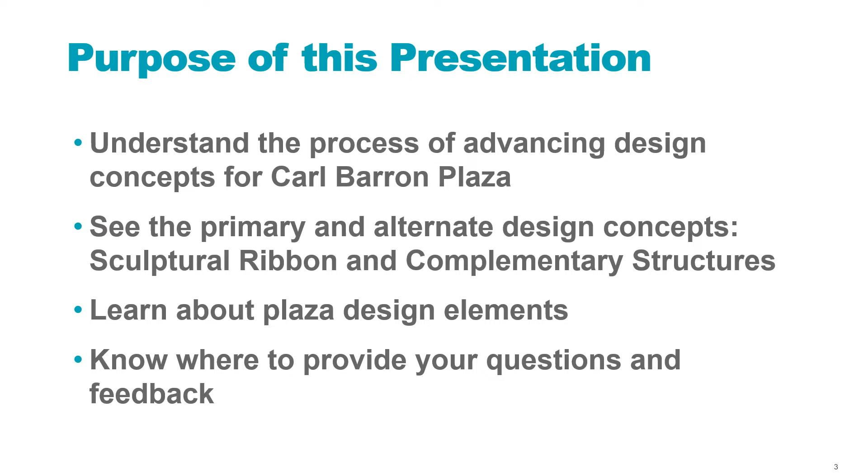This presentation's focus is on the design process and concepts for Carl Barron Plaza, located at the intersection of River Street and Massachusetts Avenue. The purpose is for you to understand the process of advancing design concepts for the plaza, see the primary and alternate design concepts, sculptural ribbon, and complementary structures, learn about plaza design elements, and know where to provide your questions and feedback.

Before we review the concepts, we wanted to highlight a few key design considerations based on feedback we've heard along the way. I won't read these in detail, but the design wants to be inclusive, activated, safe, flexible, attractive, comfortable, multimodal, functional, and all-season.

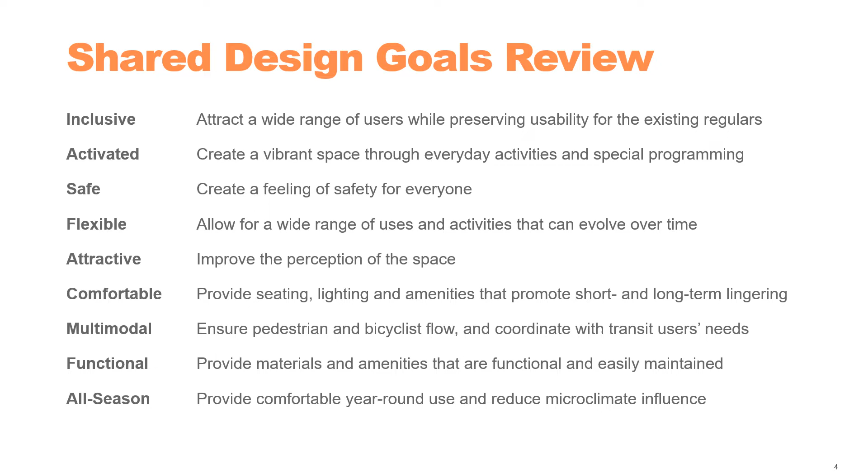A few design givens for the plaza include direct pedestrian routes through and around the plaza, 8-foot minimum, maximize tree plantings and green space, provide flexible plaza areas for a variety of activities, transit shelters at all 3 transit stop areas, an MBTA operator's booth with visibility to all 3 bus stops and layover area, bus boarding areas with an 8-foot minimum clear zone, a separated bicycle facility with 6'6" minimum, and a relocated Carl Barron Memorial within the plaza.

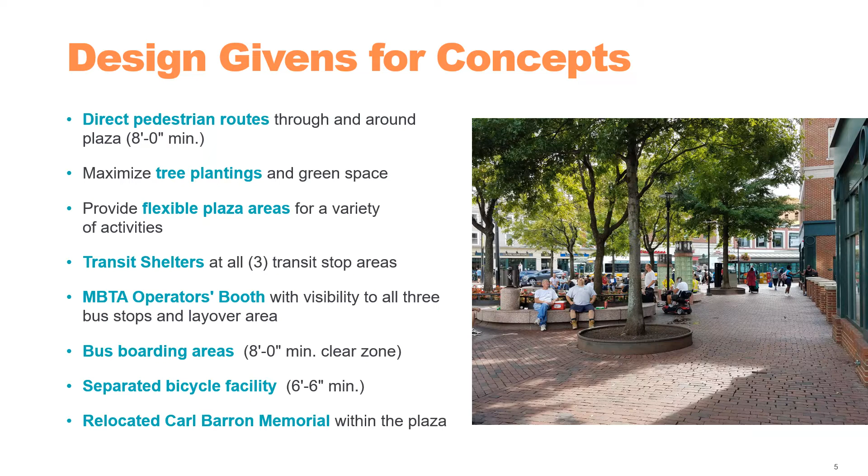Over the last 6 months, we've been working closely with the city's design staff, as well as the Central Square Business Improvement District and other stakeholders, who have shared this additional design guidance.

Establish Carl Barron Plaza as a focal point; be bold, creative, playful, and whimsical; provide enough height to be visible from a distance, but also at a pedestrian scale.

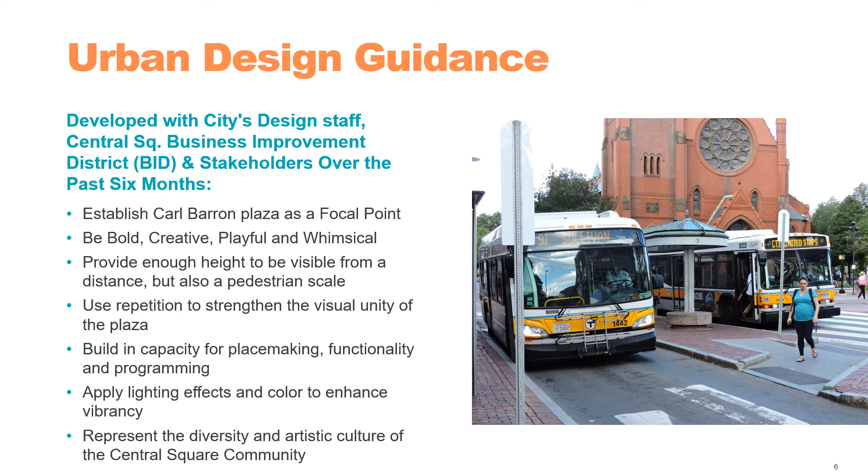Use repetition to strengthen the visual unity of the plaza, build in capacity for placemaking, functionality, and programming, apply lighting effects and color to enhance vibrancy, and represent the diversity and artistic culture of the Central Square community.

There are a significant number of utilities and other constraints within the site, so key design features and tree plantings had to be strategically placed to work around them.

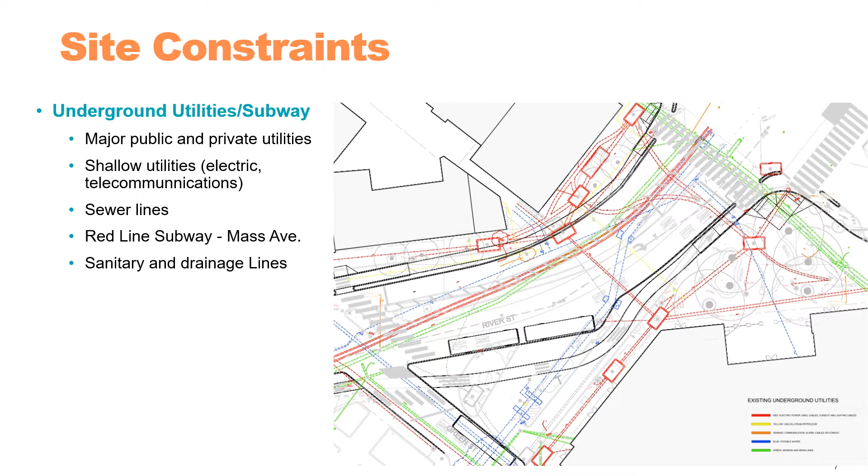Now we're going to show you a few inspirational images of similar projects that helped inform the development of the proposed concepts. These first 2 images introduce the notion of using repetitive sculptural light columns and bench underlighting as a means of unifying the design.

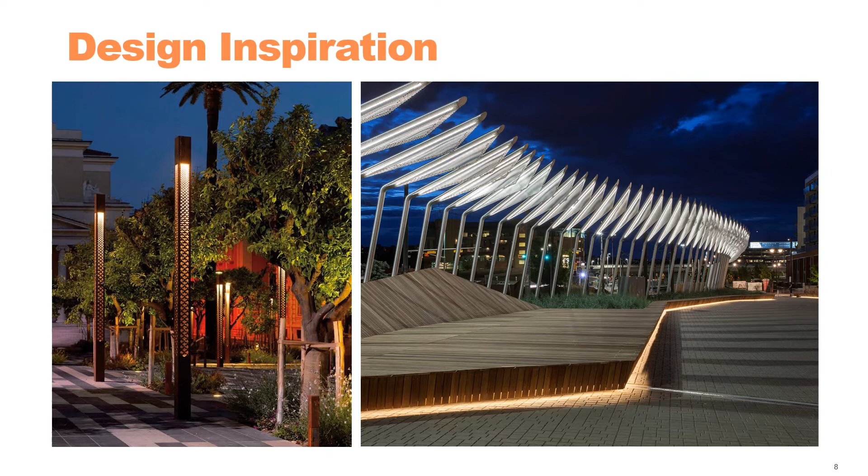These images are examples of introducing a dynamic sculptural form to serve as that unifying element. We're also intrigued by introducing lighting into the feature, similar to the image on the left, to extend the impact of the structure into the evening hours.

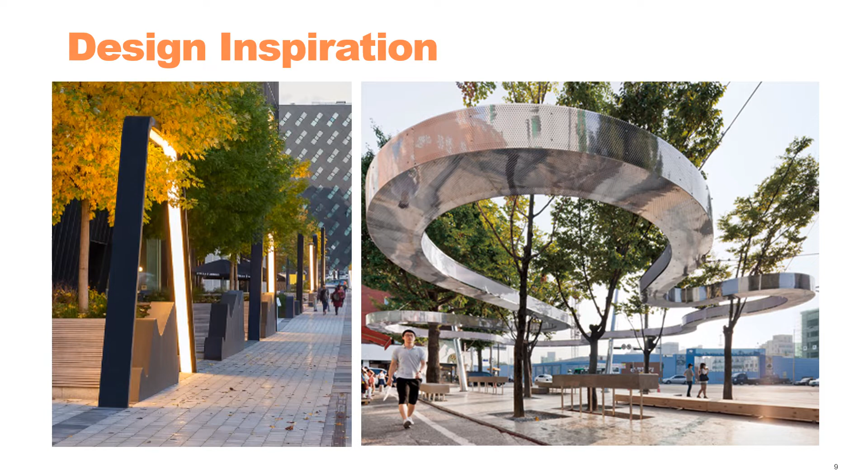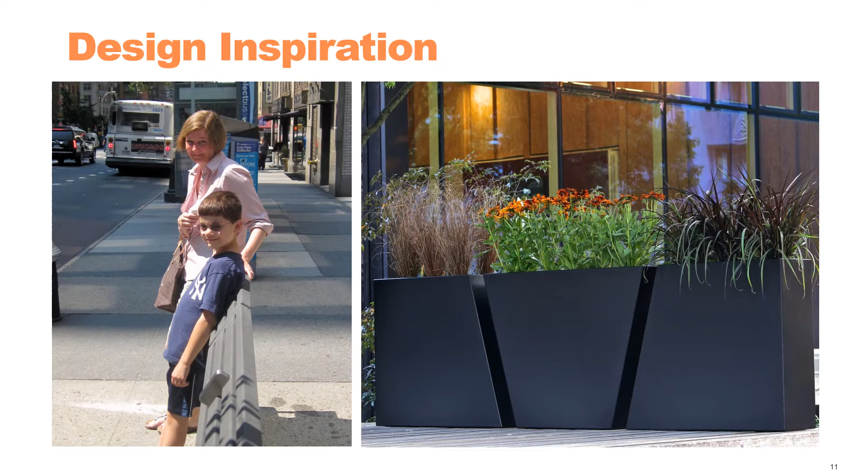In certain areas, planters or lean rails are used to separate bike and pedestrian circulation and limit the mixing of bicycle and pedestrian traffic. Finally, we plan to introduce both flexible and fixed seating.

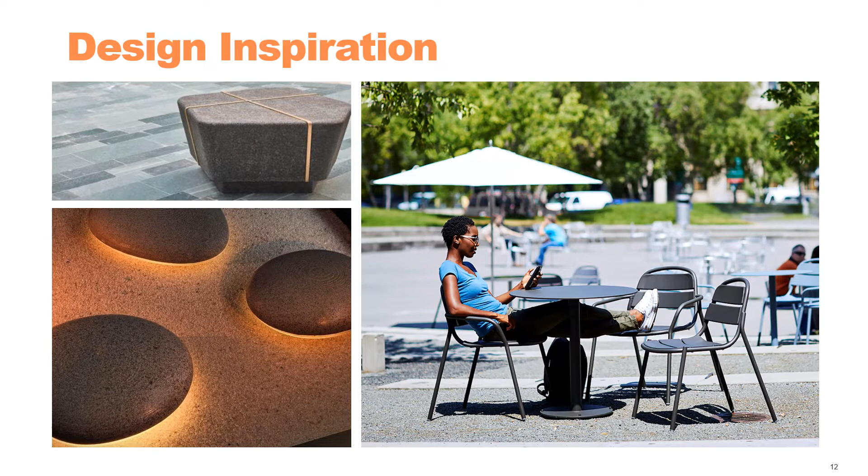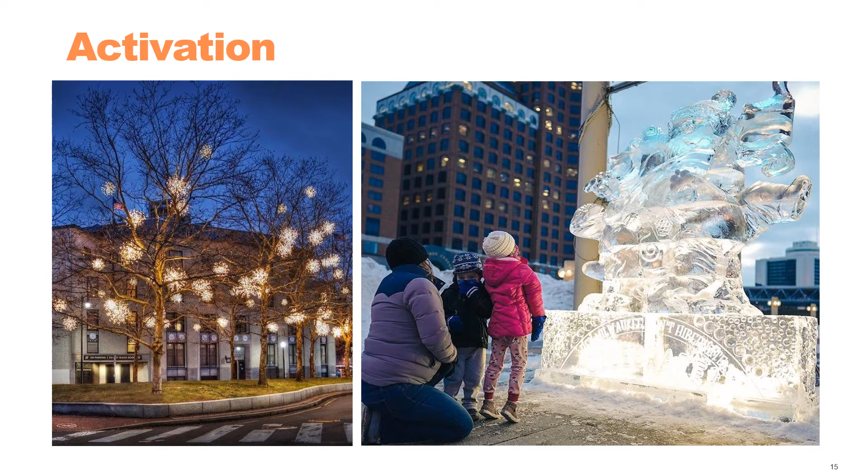And finally, we can activate the space through the winter months by introducing festive lighting or planned events that could include activities like ice carving.

We've received a lot of feedback around how we can best represent the diversity and artistic culture of the Central Square community. There's an eclectic, robust culture celebrating all forms of artistic expression, and the proposed design needs to be equally as engaging and dynamic.

And of course, we need to include typical plaza furnishings like bike racks, trash receptacles, and water fill stations, as well as the Carl Barron Plaza monument.

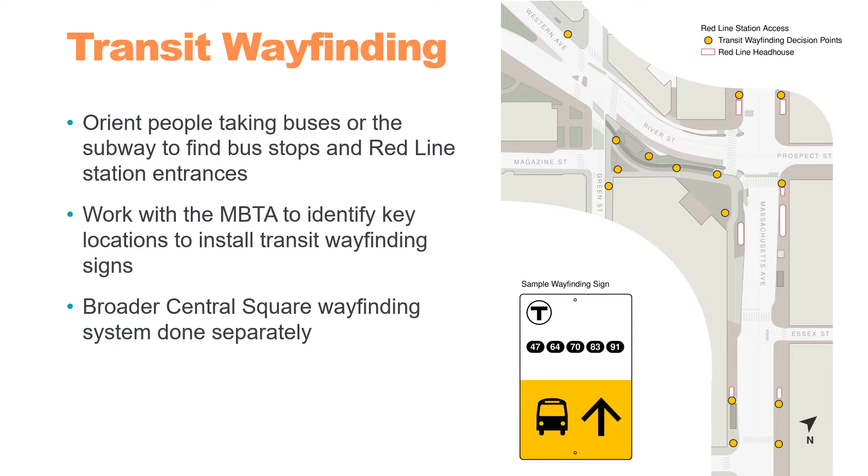This is just one element of an overarching wayfinding system for Central Square and the Carl Barron Plaza area. While the transit wayfinding elements would be incorporated into this project, the overarching wayfinding system would be studied as part of future city-led project initiatives.

As part of this project, the city is also studying the potential to incorporate a public information kiosk somewhere within Carl Barron Plaza. The kiosk has the potential to display real-time transit information, community news or events, cultural destinations, and social service information. The city is looking to identify potential locations within the plaza, along with establishing programming, operating, and maintenance responsibilities.

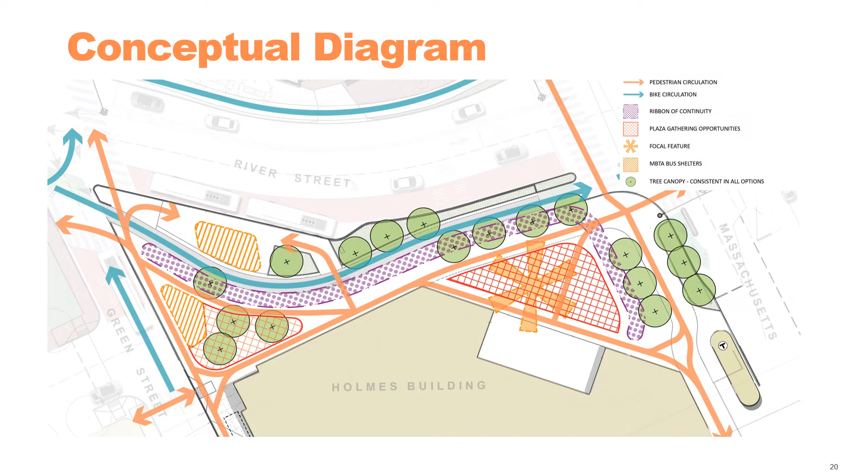In the orange hatched areas, we show two locations for bus shelters near the corner of Green and River Streets. We also plan for an additional bus shelter on Green Street at Magazine Street. Finally, the proposed tree locations you see here are consistent in both proposed options.

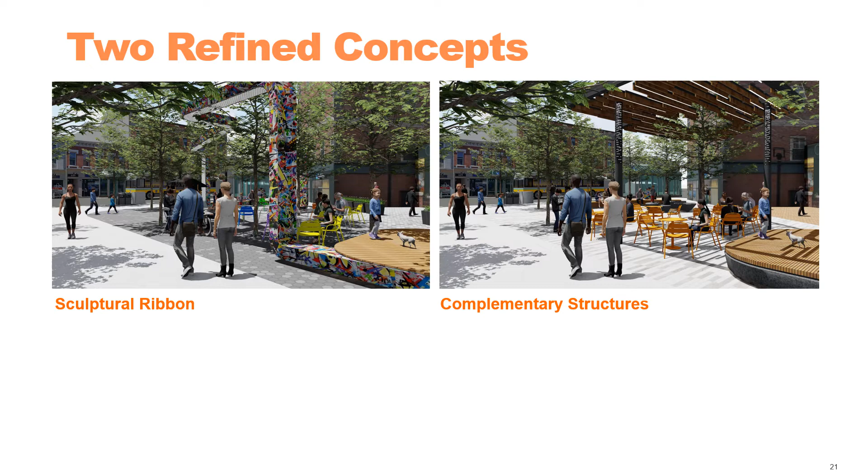As we noted, the project team will show two concepts developed based on feedback from various stakeholders. We're calling them the sculptural ribbon concept and the complementary structures concept. To date, the working group and other stakeholders have shown a preference for the sculptural ribbon concept. Generally speaking, the consensus was that this concept exemplified the dynamic nature of the Central Square community.

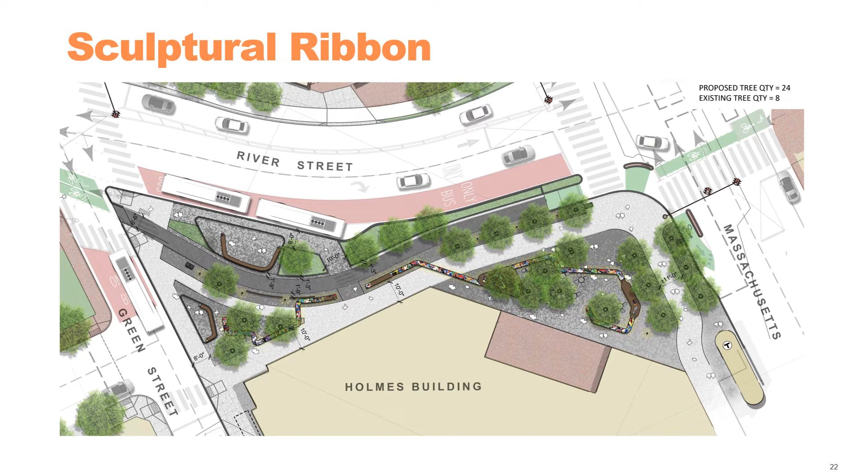We'll now show you some views of this plaza concept. To orient everyone, Mass Ave is on the right of the image, with River Street on top and Green Street on the left. The bus stops will be where they're shown on River Street and Green Street. The separated bike lane is shown in dark gray running parallel with River Street, with primary pedestrian paths shown in light beige gray running parallel with the bike lane and Mass Ave.

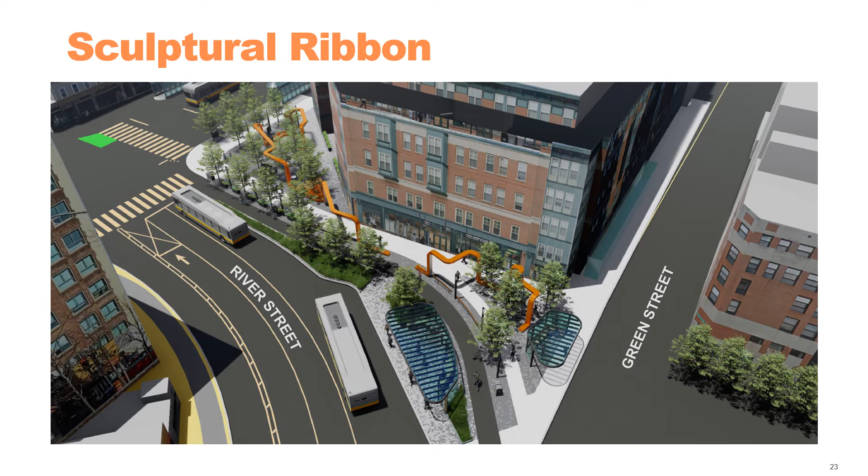We've also maximized tree planting in this option, offering shaded gathering opportunities throughout the plaza. From the primary access point at the Green Street end of the plaza, simple bus shelters frame the gateway, and repetitive light columns are introduced to draw you further into the site.

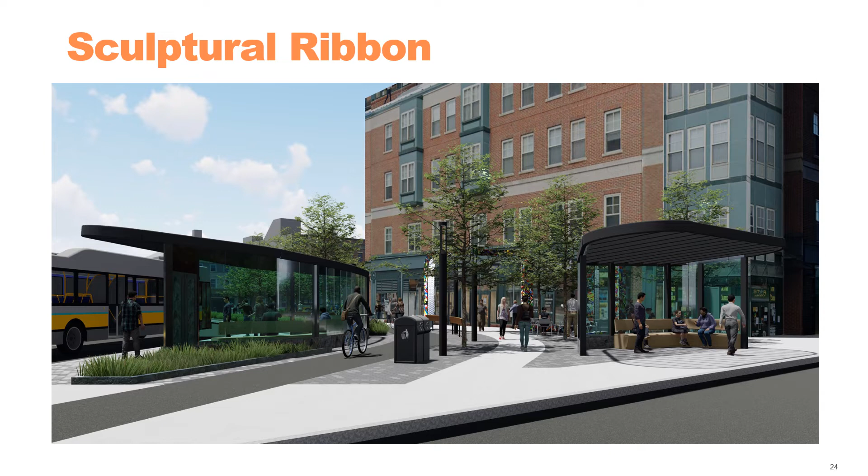Looking back towards the Green Street entrance, the sculptural ribbon rises up overhead and touches back down for one of the many seating opportunities along its length. To the right is the separated bike lane, with lean rails introduced to reduce mixing of pedestrian and bicycle traffic. The small shaded gathering area straight ahead would be populated with flexible furnishings.

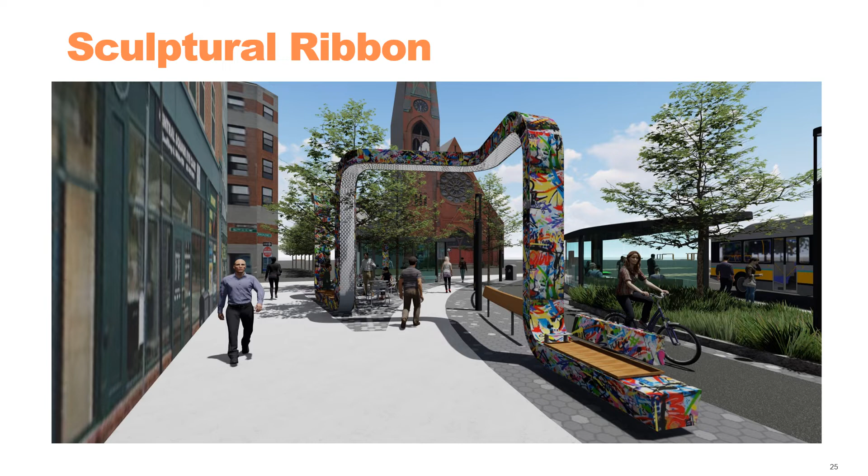One thing to note is that we're investigating the potential for introducing variety into the feature over time. With contributions from local artists, the patterning on the sculpture could potentially be changed periodically, and is thus illustrated within this presentation in a variety of colors and patterns.

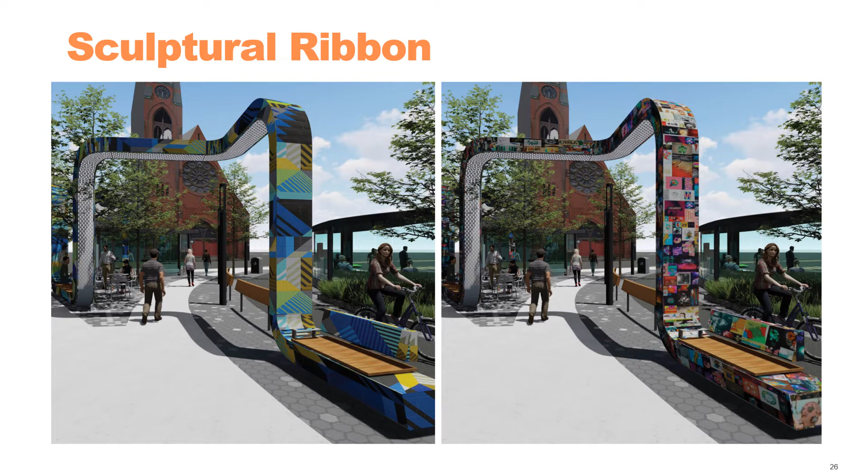As one rounds the corner of the Holmes building, the plaza opens up to the largest gathering space. Colorful, flexible furnishings are introduced under the ribbon structure at the Mass Ave end of the plaza, which could be temporarily removed as desired to accommodate larger programmed events.

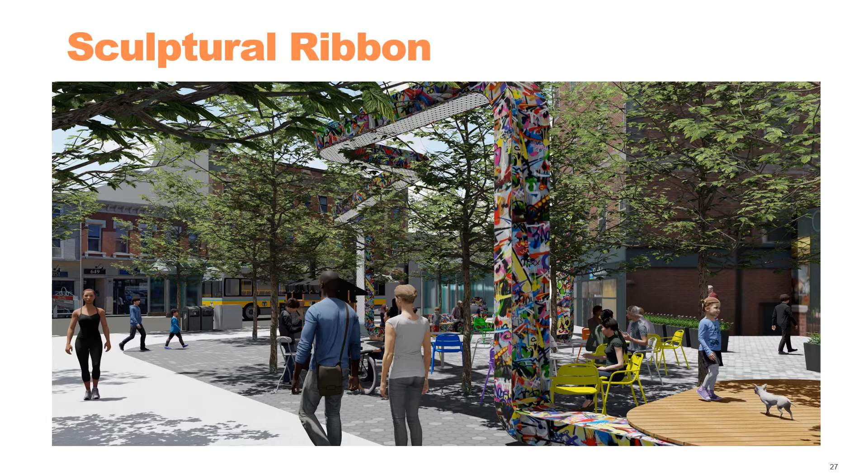In the lower right-hand corner, a platform seating feature has been introduced that can double as a stage for larger events. The ribbon of continuity extends into the primary plaza space, unifying both ends of the elongated plaza. As the ribbon touches down, it widens at the base to offer seating in both directions, with seat backs and armrests in certain locations.

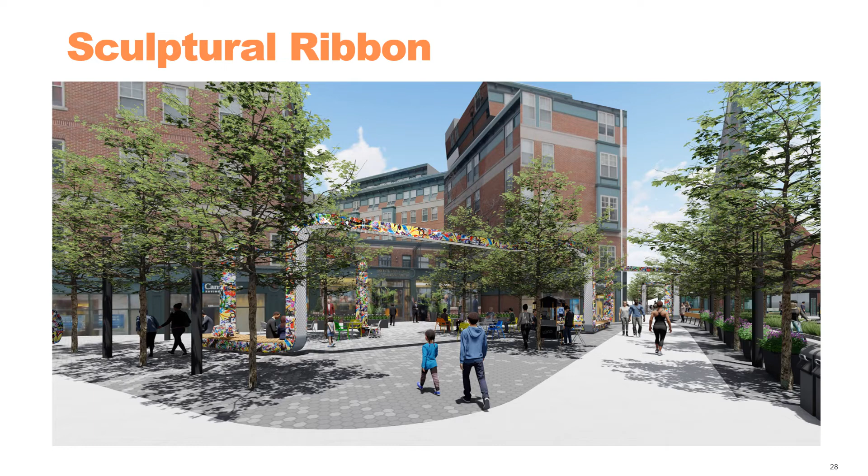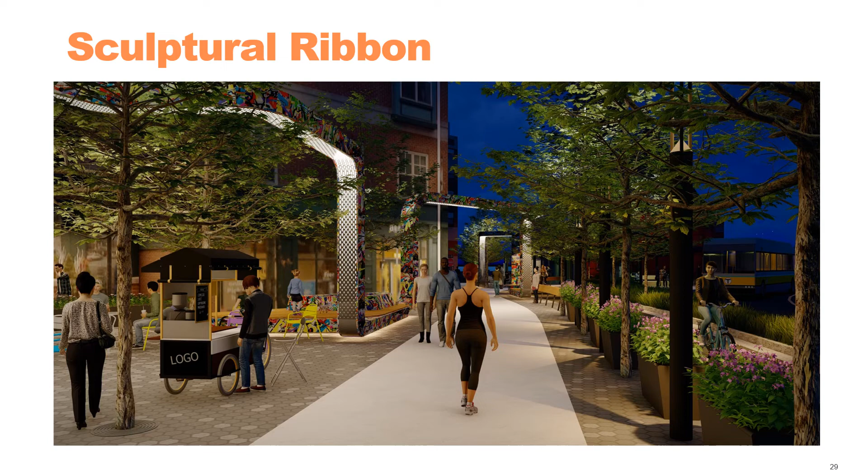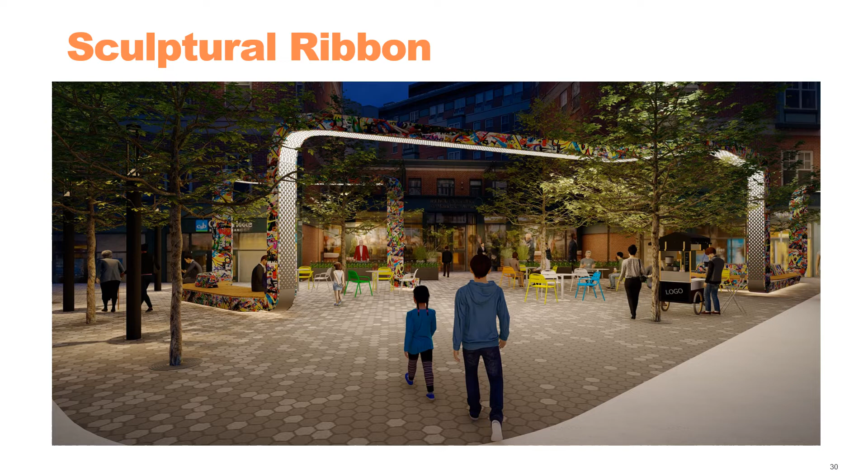Introducing backlit perforated metal on the underside of the ribbon accentuates the form and extends the impact of the structure into the evening hours. Adding underlighting to the points where the structure touches down provides the illusion that the sculpture is floating. Another view of the main plaza shows the ribbon arching up overhead, framing views into the site and serving as a catalyst for ongoing programming and activation.

From here, we'll show some images of the complementary structures concept. The general layout is the same as the sculptural ribbon concept. The key differences are that this concept has a pergola structure at the Mass Ave end of the plaza and relies on repetitive light columns as another unifying element.

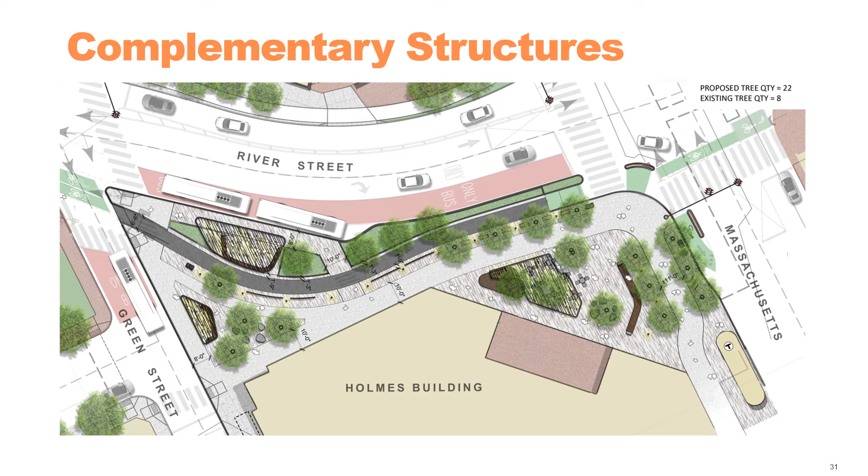The intent is that the MBTA bus shelters would share a similar design vocabulary as the pergola structure, anchoring both ends of the plaza. Looking back at the plaza from above the intersection of River and Green Streets, you can start to see the similarities in texture between the pergola structure and the bus shelters.

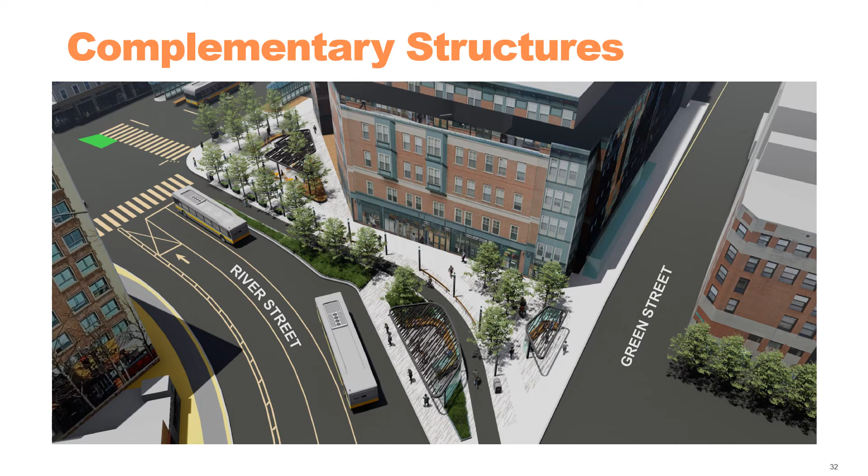Along the primary circulation route, repetitive light columns and lean rails are introduced to help unify the elongated plaza space. We've maximized tree planting in this concept as well to provide shaded gathering opportunities throughout the plaza.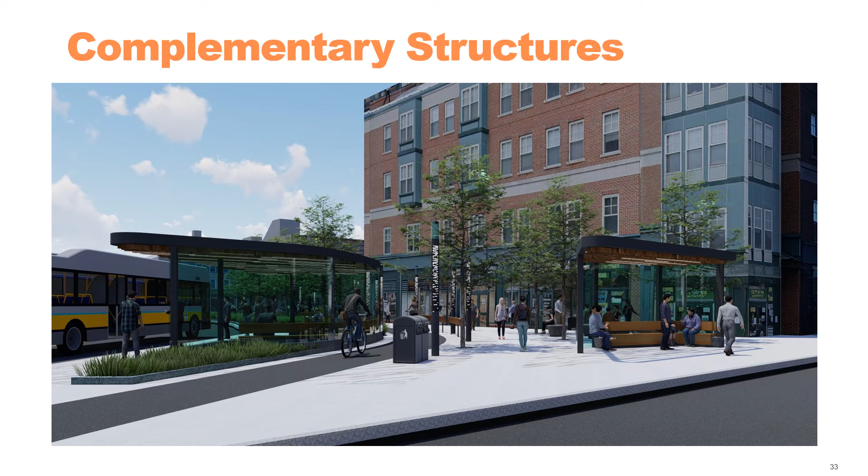From the primary access point at the Green Street end of the plaza, simple bus shelters frame the gateway and repetitive light columns are introduced to draw you further into the site. A view looking back towards the Green Street entrance.

To the right is a separated bike lane, with lean rails introduced again to limit mixing of pedestrian and bicycle traffic within the plaza. A small shaded gathering area straight ahead would be populated with sculptural seating features.

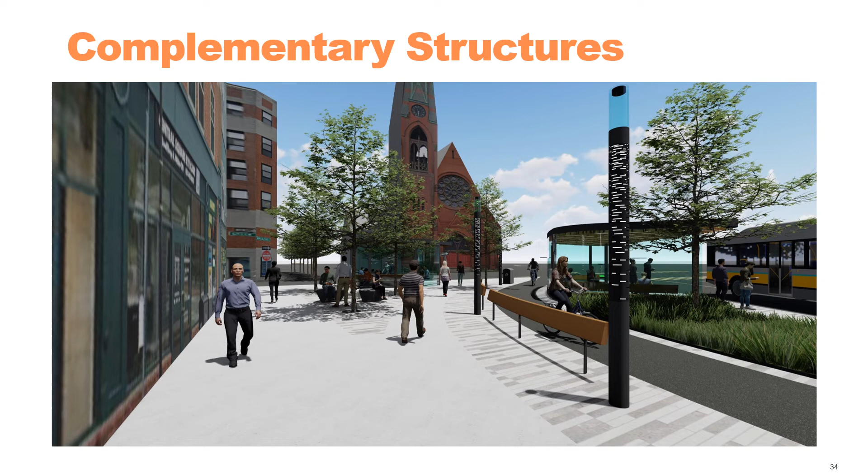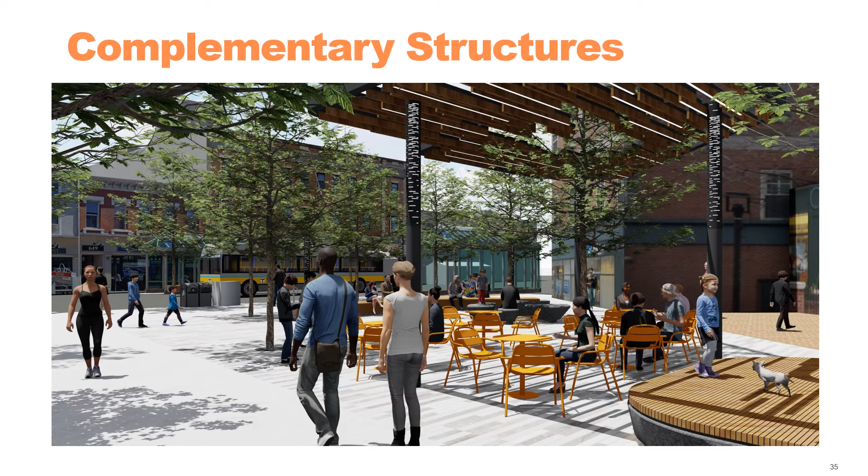Flexible furnishings are introduced under the pergola structure, which could be temporarily removed as desired to accommodate larger programmed events. In the lower right-hand corner, a platform seating feature could double as a stage for larger events.

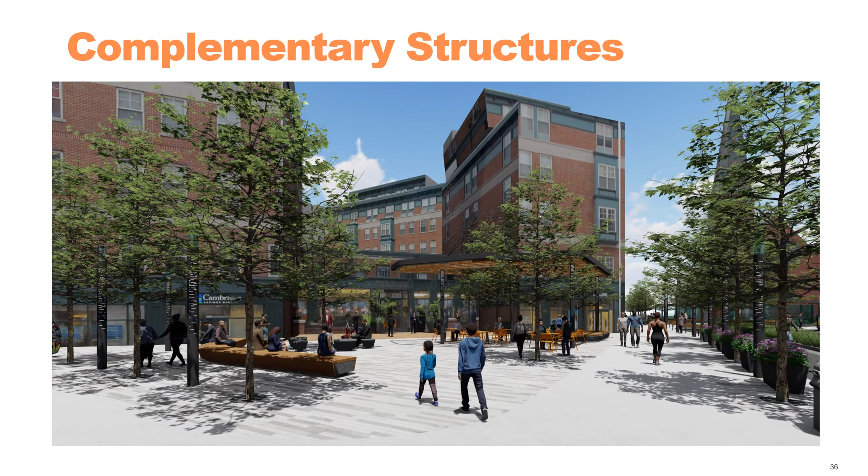Additional fixed seating elements, like the long communal bench and sculptural seats beyond, are introduced to provide spatial definition to the plaza and add year-round interest. The sculptural light columns extend into the plaza space as a primary unifying feature.

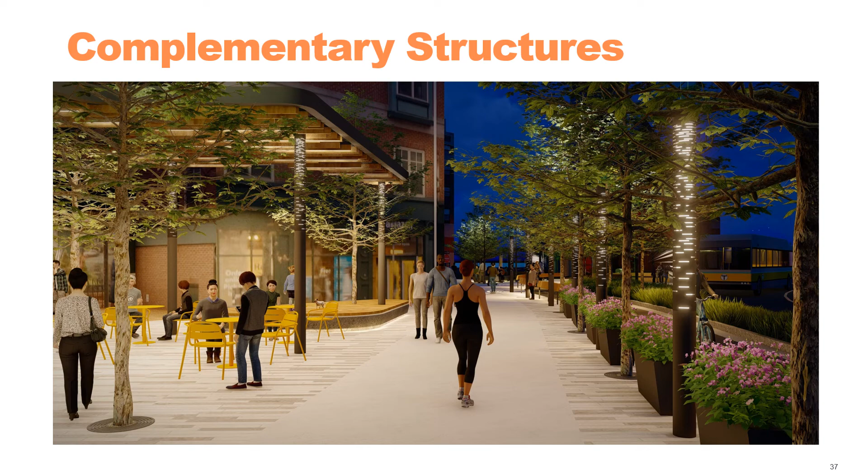At night, the light columns, bench, and lean rail underlighting unify the design while emphasizing primary circulation routes. Additional lighting incorporated in the pergola structure, communal bench, and sculptural seating features adds vibrancy to the plaza in the evening hours.

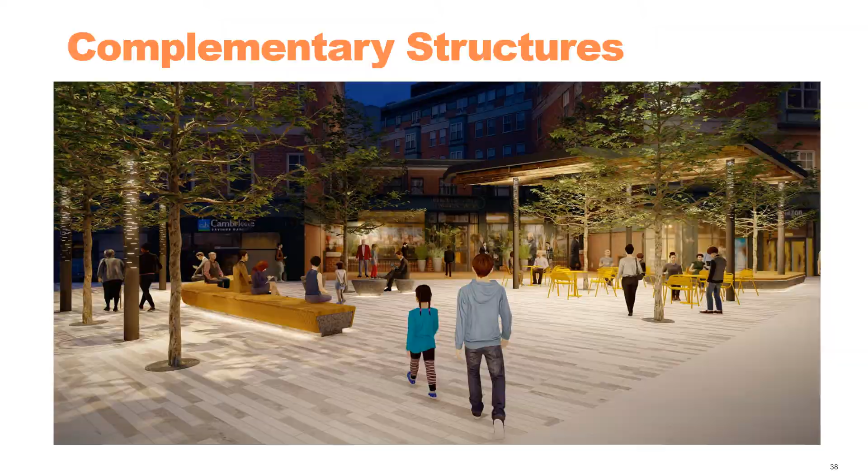In summary, within the preferred design concepts, we've introduced a robust tree canopy, repetitive lighting and/or sculptural elements to unify the design, a richly textured ground plane to enhance plaza unification, a combination of fixed and flexible furnishings to accommodate event programming, and simple, elegant bus shelters that complement the overall plaza design and capture the spirit and vibrancy of the Central Square community with a bold expression.